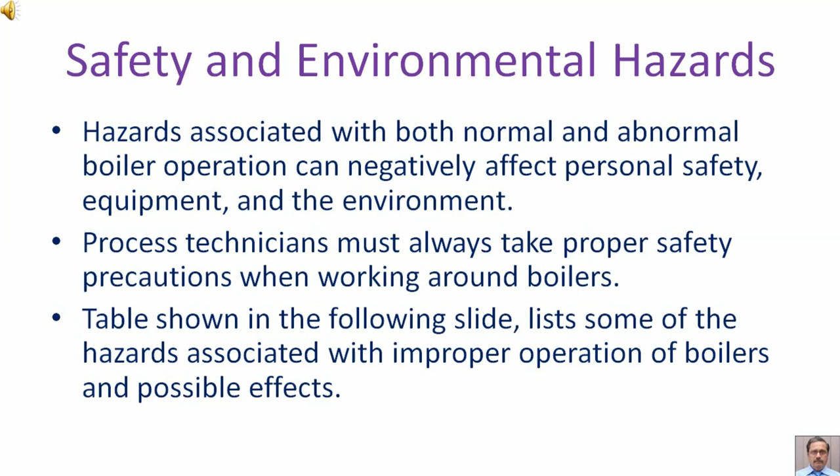The table shown in the following slide lists some of the hazards associated with improper operation of the boilers and possible effects. The table showing hazards associated with boiler operation. In this table, on the left side, we have a list of improper operations, and on the right side, we have the possible effects of the improper operation.

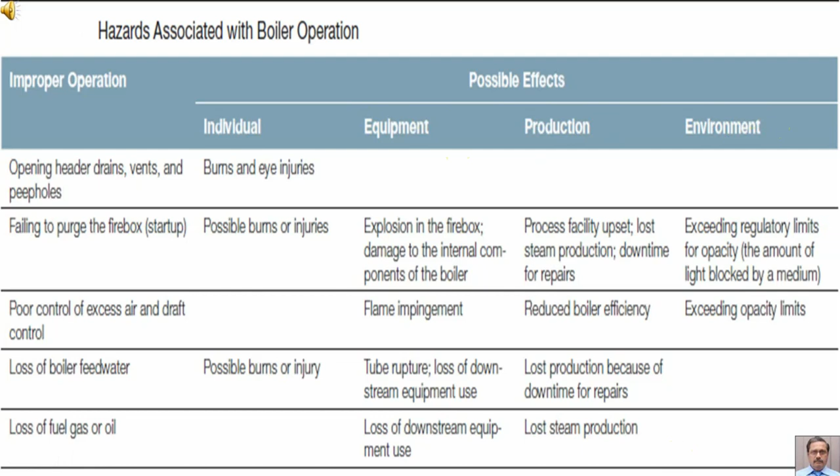Possible effects are of four kinds, pertaining to individual, equipment, production, or environment. In the next few subsequent slides, we shall be talking about the improper operations and then their possible effects.

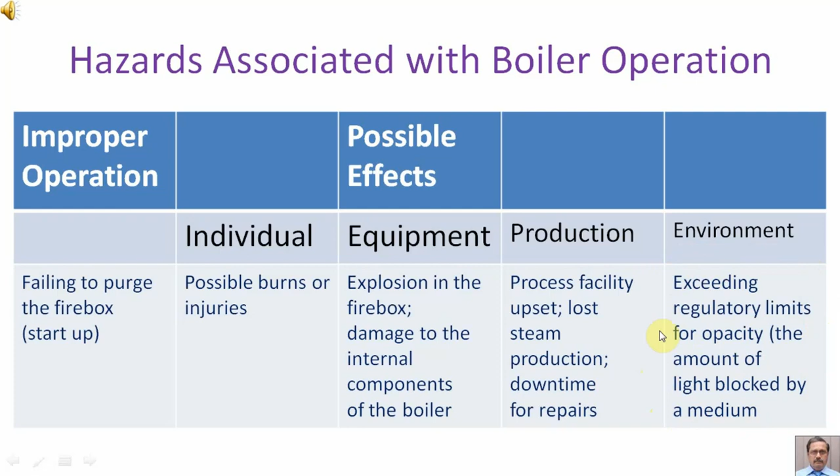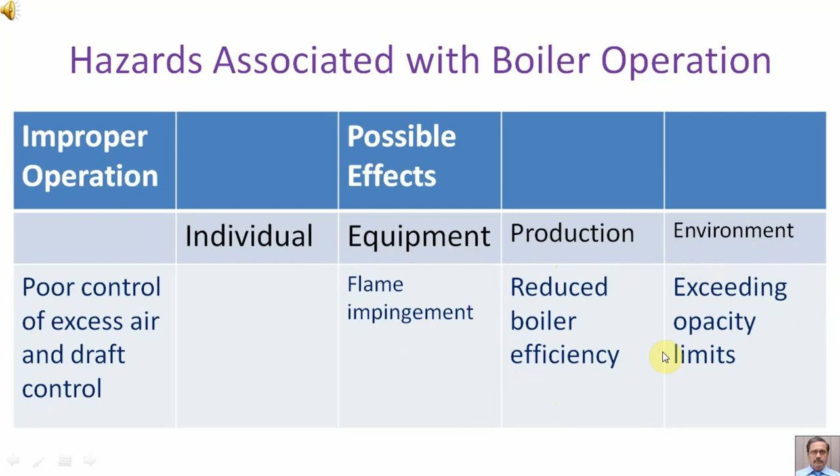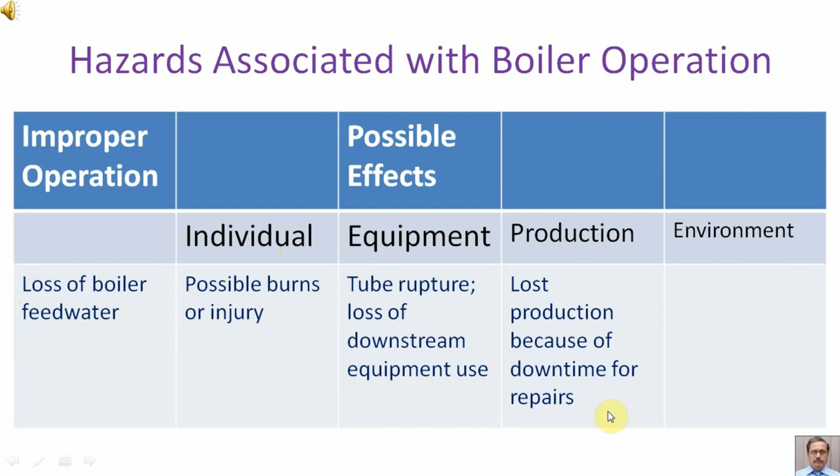The improper operation: loss of boiler feed water. To the individual, the possible effect is possible burns or injury. Possible effect to the equipment is tube rupture, loss of downstream equipment use. Effect to the production: lost production because of downtime for repairs.

Improper operation: loss of fuel gas or oil. Possible effects to the equipment: loss of downstream equipment use. Effect on the production: lost steam production.

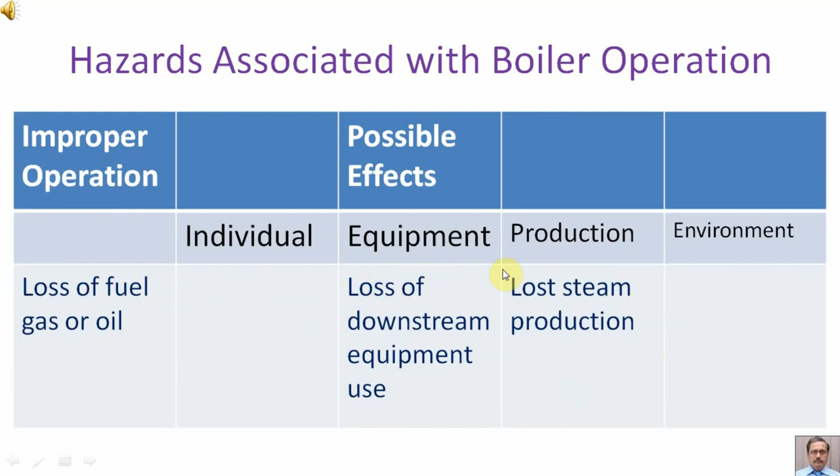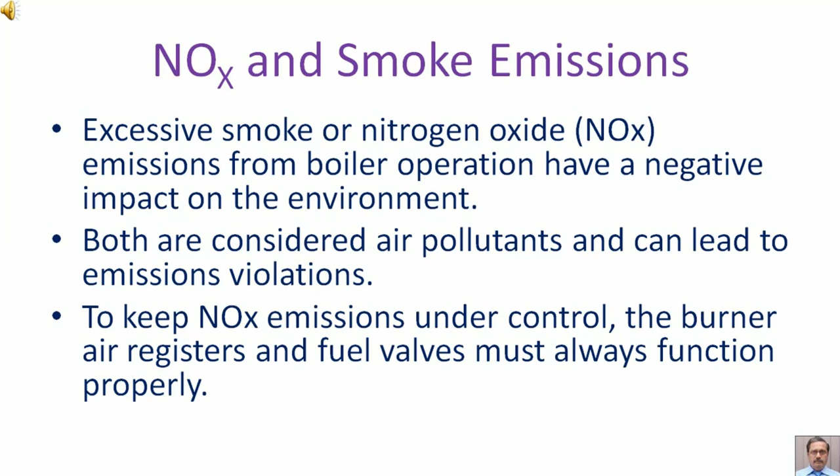Nitrogen oxide and smoke emissions. Excessive smoke or nitrogen oxide emissions from boiler operation have a negative impact on the environment. Both are considered air pollutants and can lead to emissions violations. To keep nitrogen oxide emissions under control, the burner air registers and fuel valves must always function properly.

Understanding and controlling oil burner operations allows the right balance for complete combustion and control of smoke emissions. Process technicians should also be cautious when handling chemicals to reduce environmental impact.

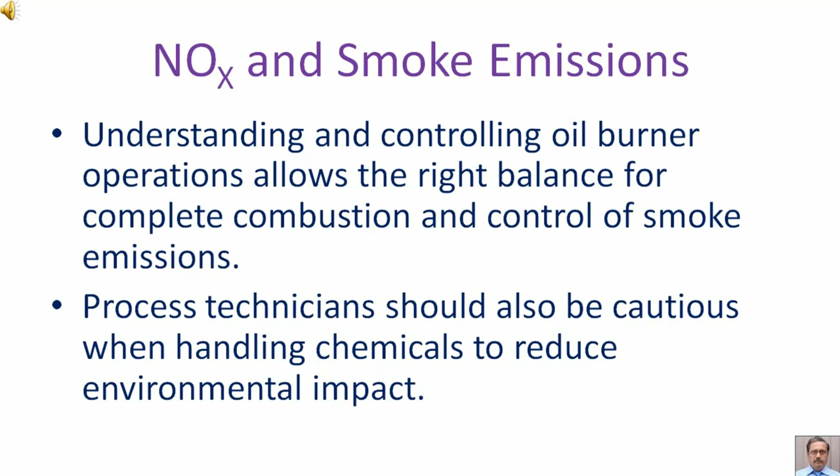Fire protection and prevention. The most potentially hazardous operation in steam generation is boiler startup. During startup, flammable mixtures of gas and air can build up as a result of flame loss at the burner during light off, that is, when the pilot flame is ignited. Each type of boiler requires specific startup and emergency procedures, including purging before light off and after misfire or loss of burner flame.

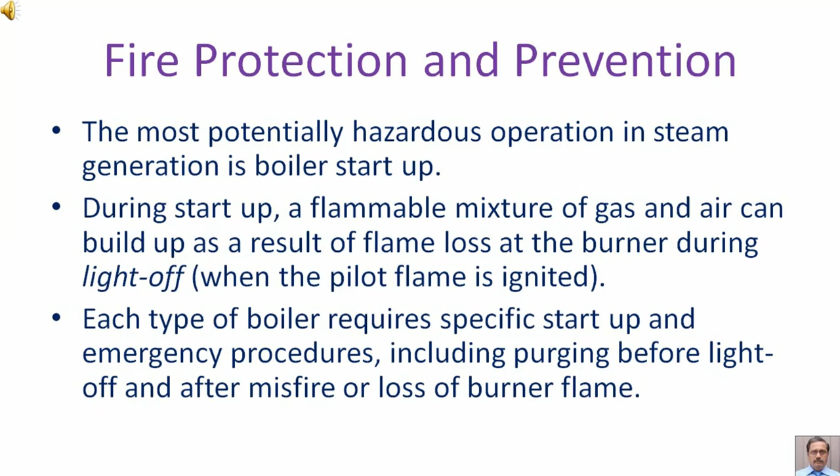Hazardous operating conditions. Hazards exist during both normal and abnormal boiler operation. For example, there is a potential for exposure to feed water chemicals, steam, hot water, radiant heat, and noise. Alternate fuel sources might be available on site in the event fuel gas is not available due to a process unit shutdown or emergency.

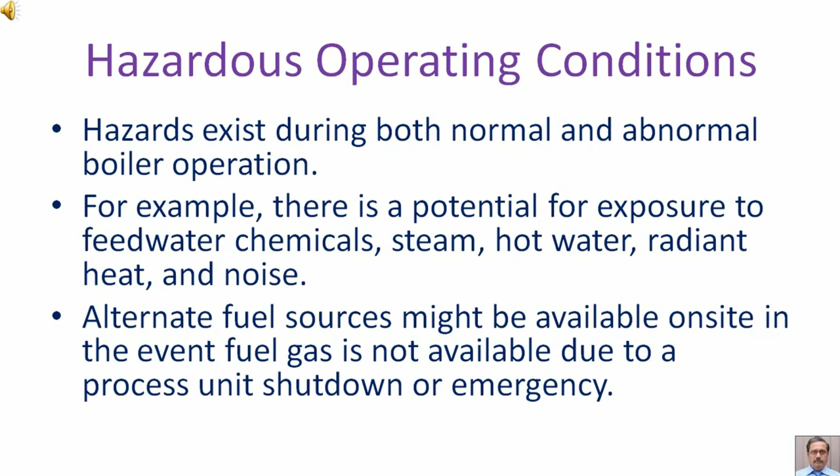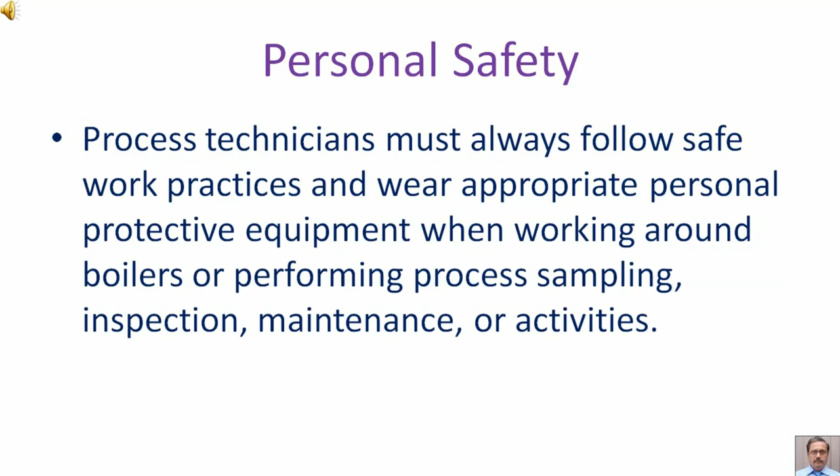Personal safety. Process technicians must always follow safe work practices and wear appropriate personal protective equipment when working around boilers or performing process sampling, inspection, maintenance, or other activities. Process technicians should also avoid skin contact with boiler blowdown because it can contain hazardous chemicals.